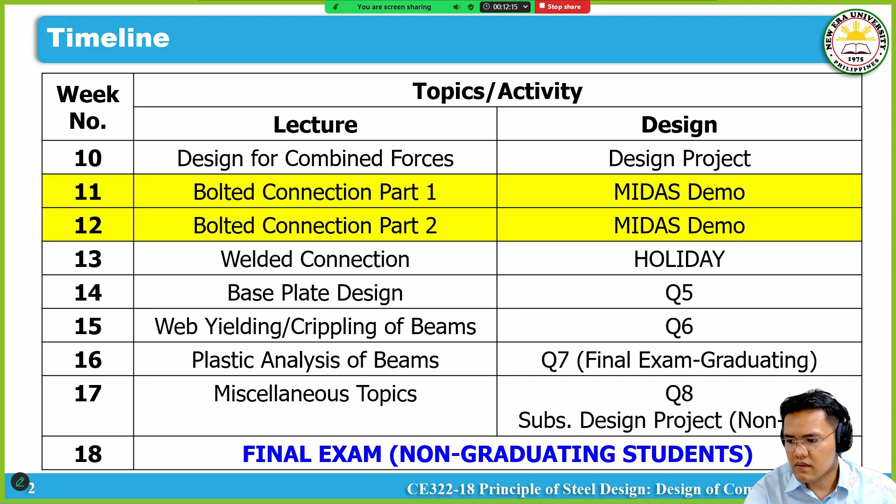So chapter 7 na tayo, which is bolted connections. Tapos na tayo sa member design, okay? Ang next stage is to do connection design.

So ito yung mga learning outcomes natin for today: understand the advantages and disadvantages of bolted connections, explain at least one bolt installation procedure, enumerate different modes of failure for bolted connections, determine the bolt capacity or strength using bearing type connection as well as slip critical connection, also what if combined stress na siya under these two types of bolted connections, and also to design eccentric bolted connection, which is discussed on section 510.3 of NSCP 2015.

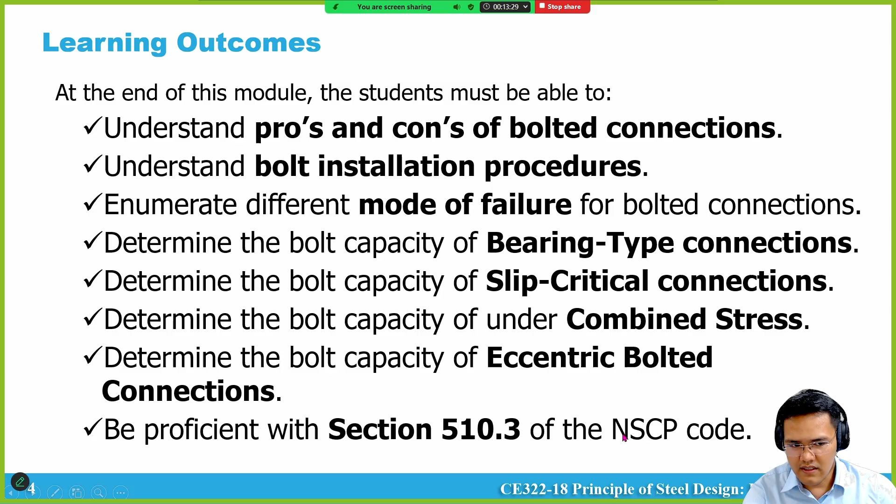Okay, sige, introduction muna tayo to connection design. So, just ground rules, no, to and some quotes to help set the tone for the presentation for today.

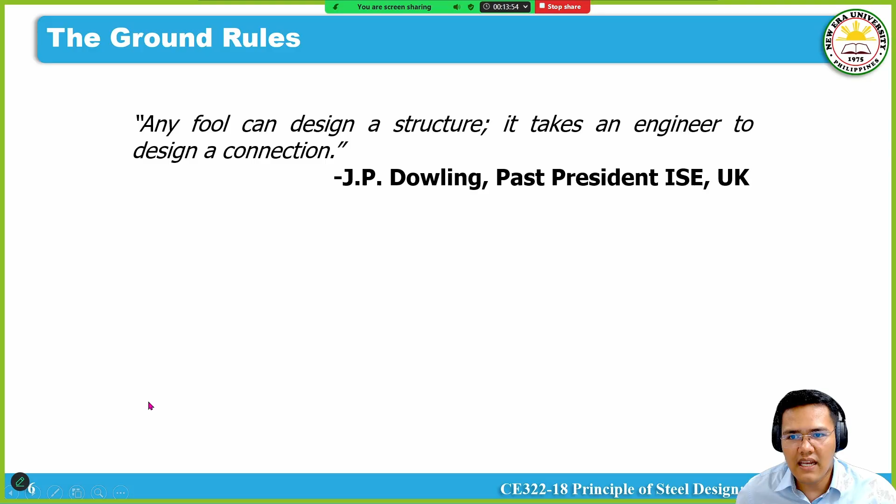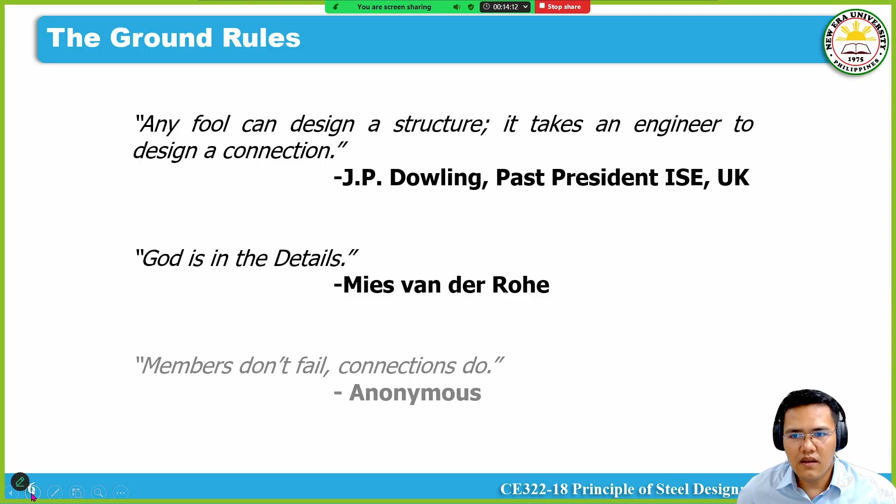So, any fool can design a structure. It takes an engineer to design a connection. God is in the details. Okay, so don't take this literally. Ibig sabihin lang niyan, vital or critical yung detailing ng ating mga connections. And lastly, members don't fail, connections do.

Okay, so just a recap in terms of the design process, we already explained this on the previous chapter, but if we would continue specifically dun sa last stage, which is the design and detailing, ang sabi natin dito, kapag pasado ka na sa member design, okay ka na sa member design, the next step, assuming na acceptable na yung member design mo, is to proceed in the connection design and detailing.

Okay, so yun yung step. Hindi pwedeng mauna si connection design bago mag-member design. Primarily because kapag merong changes, sa halimbawa, inuna mong gawin yung connection design and merong changes in terms of the dimension ng member mo, after mo proceed sa member design, uulitin mo ulit si connection design. So, to make sure na hindi repetitive yung ating calculations, we should always proceed with the member design, and then to follow si connection design.

Just to give you an idea, in terms of actual practice, meron tayong dalawang two possible workflow on steel design, specifically on connection design. Usually, dito sa Philippine setting, meron tayong as I've mentioned, dalawang workflow.

Yung option 1, which is usually nangyayari sa Philippine setting, is yung scenario na kung saan yung engineer of record or the EOR of the member design would also perform the design of your connection. So ibig sabihin, for option 1, kung sino yung gumawa ng member design, siya rin yung gagawa ng connection design. Now, yung option 2, which is usually adapted sa US, may scenario doon na kung saan kung sino yung engineer of record or the EOR for the member design, separate yung EOR ng connection design.

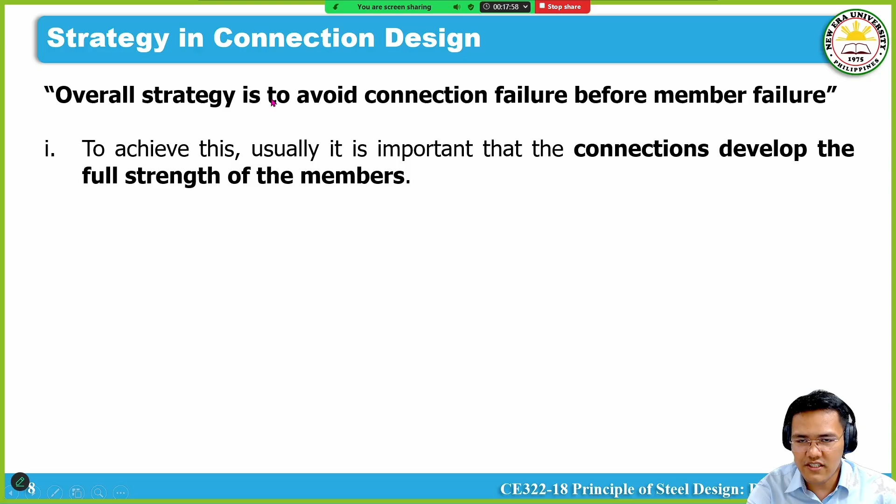Okay, ito yung overall strategy sa connection design. So the overall strategy is to avoid connection failure before member failure. Bakit? Kasi alam niyo na 'to, di ba? At para ma-achieve daw 'to, yung overall strategy na 'yan, dapat yung connections mo should develop the full strength of your member.

Basically kasi kapag sinabing connection failure, yung connection failure is not as ductile as the steel member failure. Parang pag sinabing connection failure, it's brittle failure. Without warning, magpe-fail yung structure mo. Gusto natin ductile mode of failure like yielding na usually occurs on your member, so hence it is desirable to avoid connection failure before the member failure. So dito pa lang nagkakaroon ka na ng idea, based dito sa argument na to na dapat yung capacity ng connection should always be greater than the capacity of your members. Ito yung pinaka overall strategy natin in doing connection design.

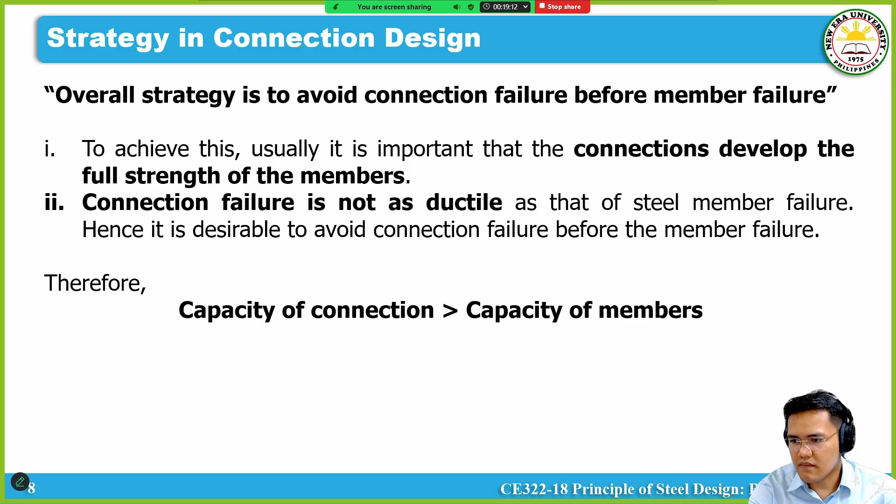These are past disasters I want to show you. Number one, the Hyatt Regency Hotel collapse, for buildings. This is the link I'd like you to watch on your own. And the I-35W bridge collapse in the US, for bridges. Here's the link for the documentary video on YouTube.

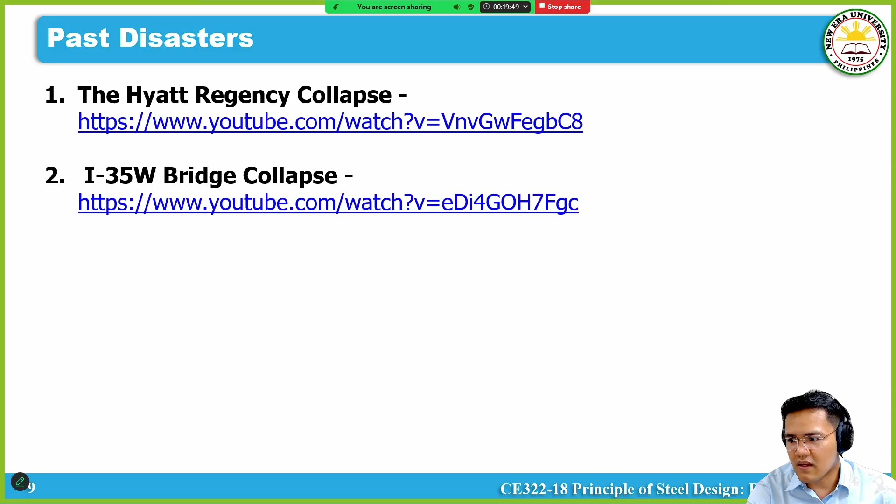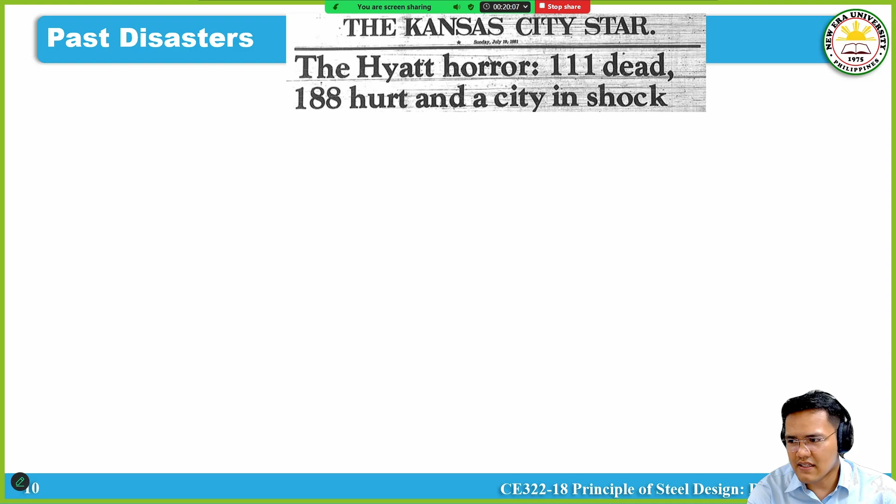Number one, the Hyatt building. Here's what happened: there were about 1,000 people in a certain structure where they had an event. Suddenly, the canopy collapsed, killing 111 people.

As they say, a doctor could kill a person one at a time, but an engineer could make it efficient, killing multiple people at once. So hopefully it's not like that — hopefully it's the other way around, where a doctor can save a person one at a time while an engineer can save multiple persons at once using a safe and sound design.

So that's what we hope happens. Anyway, the reason for this scenario is that this skywalk was supported by tension rods. What happened is there were changes to the original design of the engineer.

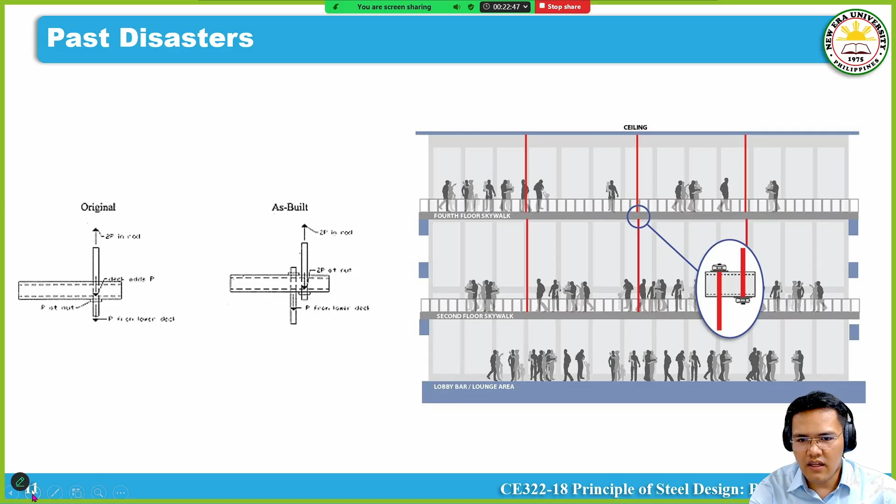I'd like you to check the video and the explanation. Basically, there was a change in design between the original and the as-built, and that was approved by the engineer, recommended by the contractor, probably to fast track construction. That's the reason why the skywalk failed.

This is specifically the part of the deformed box beam on the failed connection. That's one of the pictures on site during the forensic investigation.

So the overall lesson learned from this tragedy is that connections should be designed by a qualified engineer at some point in the design and construction process. Also, internal quality review is important for spot checking, especially if there are changes to the contractor's proposal.

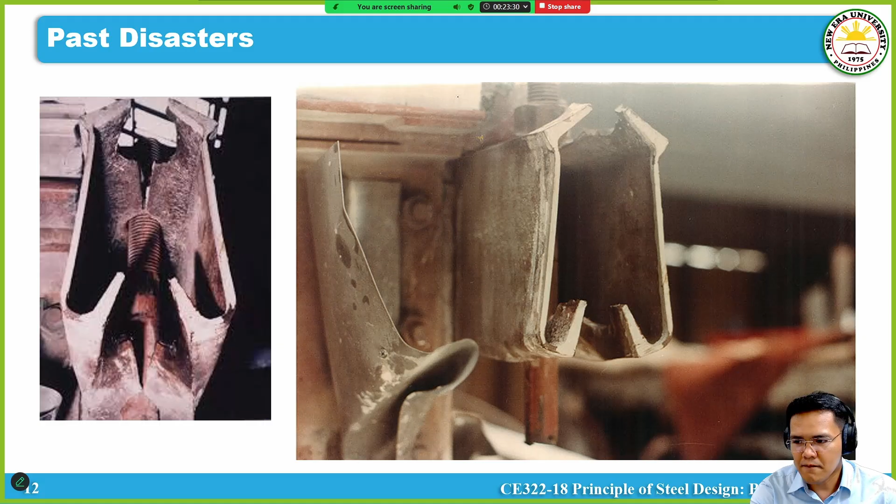Let's move on. Another example of a past disaster is the collapse of the I-35W bridge in the USA, back in 2007. What happened was during a busy time, rush hour, vehicles were bumper to bumper.

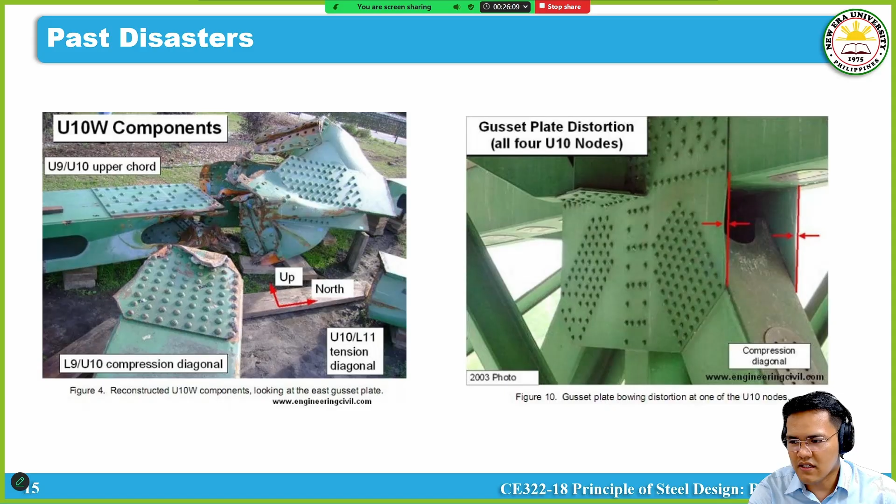Okay, we're good there. So basically what I want you to understand is that connection design is not something you take lightly, because many structures fail, and it's a critical mode of failure because they don't check their connections appropriately.

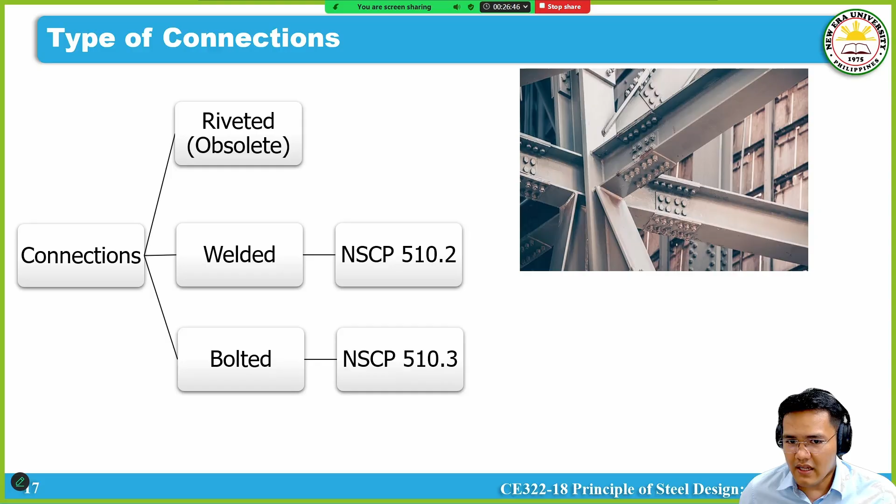So let's proceed on types of connection. As per the code, we have two present: number one, welded connection, which is presented on this section, and number two, bolted connection, which we'll discuss for today. There used to be a third type, riveted connection, but that's somewhat obsolete now.

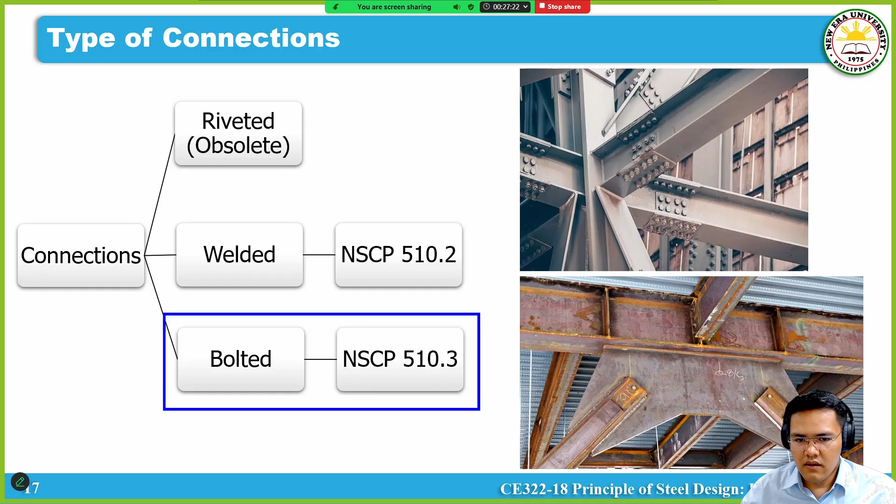So this is an example of bolted connection, obviously using bolts, and this is an example of weld. We would focus our discussion for today on bolted connections.

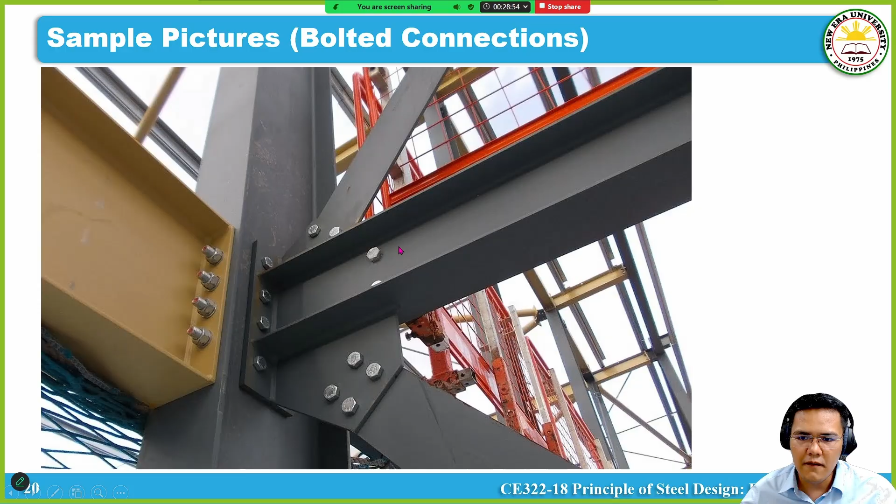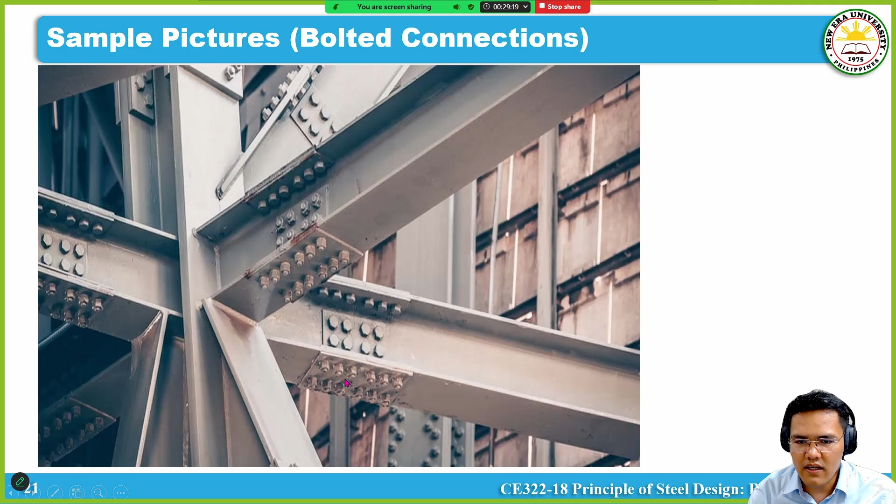Okay, this one is also bolted connection, but in this case, the connection to the column is welded. What's bolted is the continuation, possibly on the beam, beam to beam continuation, so both the flange and the web are bolted.

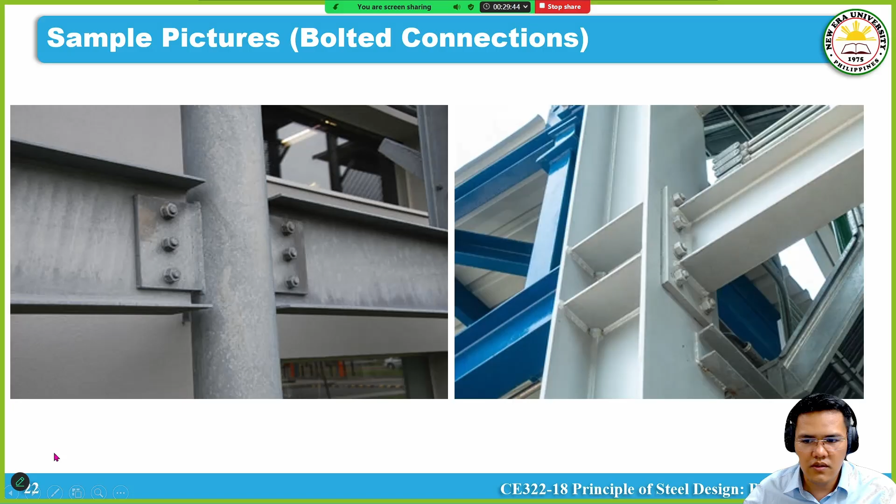Another example of end plate and stiffener plate for columns. So there's a continuation of connections. This one is another example.

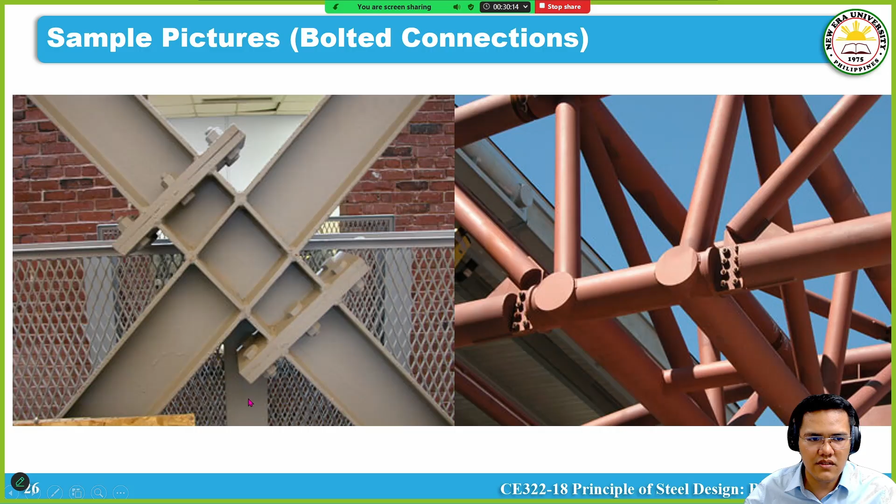This one is from software to actual construction. Another example of connections, hollow sections, bolted connection. So those are the examples for bolted connections.

Now let's discuss what's called idealized connections. So the question now is, how do we idealize our connections? It depends on what type of support you assume. Usually you have a pin support or pin connected joint, and the other one is the fixed support or fixed connected joint, like so.

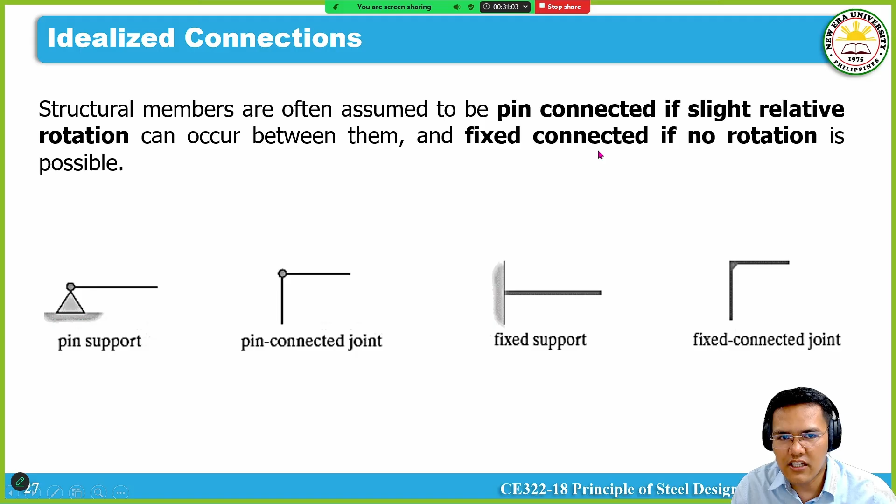For pin support or pin connection of our structural members, the assumption is that slight relative rotation can happen. While for fixed, no rotation is assumed. And obviously for pin connection, usually there's no moment at the support, while for fixed, there's obviously moment.

So this is an example representation of pin support in actual steel structure or connection detailing. You can see here that the girder connected to the column uses two angles, like so. This is the angle you see on this side, and if you look on the other side, there's also one. So these are the two.

So it's connected, bolted to the flange and also bolted to the web of the girder. Again, the assumption for this type of connection, for pin supported connection, the other term for it specifically in textbooks is a simple shear connection, which means it would resist shear only.

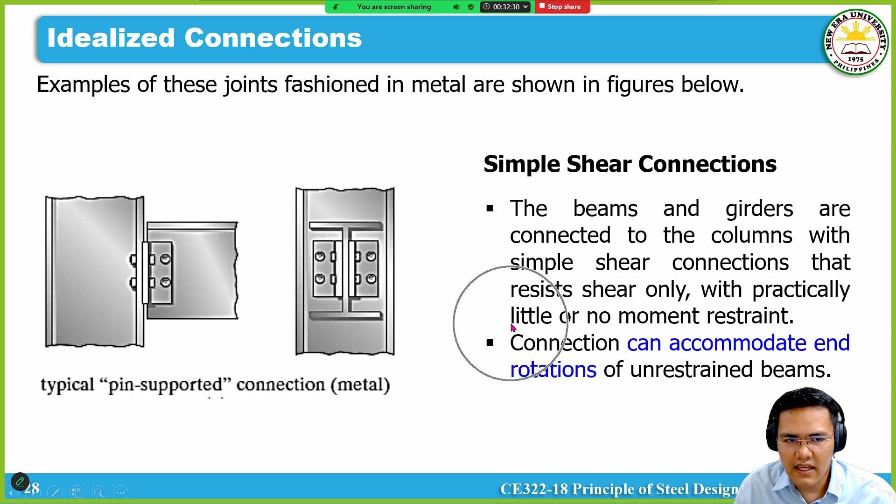And practically with little or no moment restraint. That's the assumption here. It can also accommodate end rotation of unrestrained beams. So this is what we call simple shear connections.

Similarly, for fixed support or connections, these are used in moment connections. Moment connection wherein it would resist lateral loads through bending in the columns and the beams or girders. And we have rigidity in the girder to column moment connection.

So here's an example of how it's detailed. You can see the beam is connected to the column, and as we mentioned, you add a stiffener so there's continuation in the transfer of loads. Sometimes it's even welded, so it's truly continuous. Aside from both sides being bolted, at the bottom you also add an angle which acts as a seat support for the girder. That's the seat used to idealize the actual moment connections.

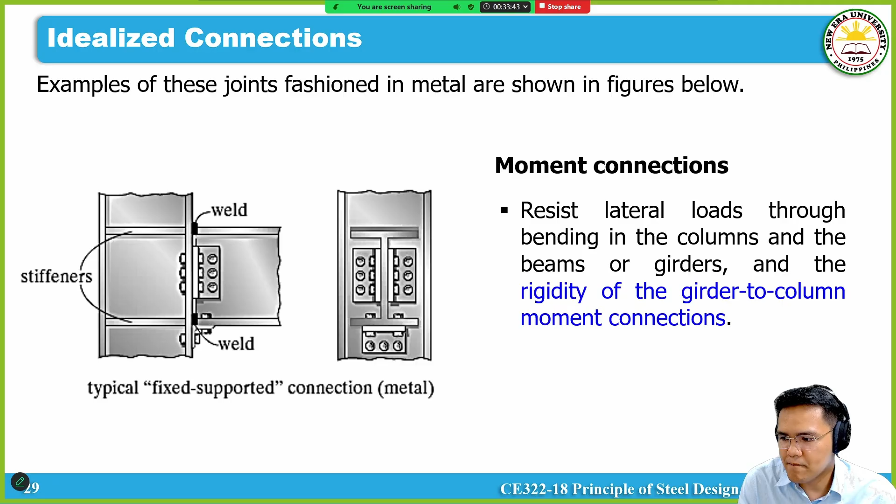Advantages and disadvantages: for bolted connections, installation is easier since it doesn't require skilled labor like welders, who usually need certification—here in the Philippines welders usually graduate from TESDA and have certification for that. With bolted connections, you can demonstrate it to another person and they learn quickly, or pick up fast on how to perform any bolted connection on site.

So it doesn't require skilled labor or special equipment. For welding, you need special equipment and power supply to operate that equipment. Bolted connections are more appropriate for field connections—connections done on-site. From a safety standpoint, there's no fire issue since no electricity supply is used for bolted connections.

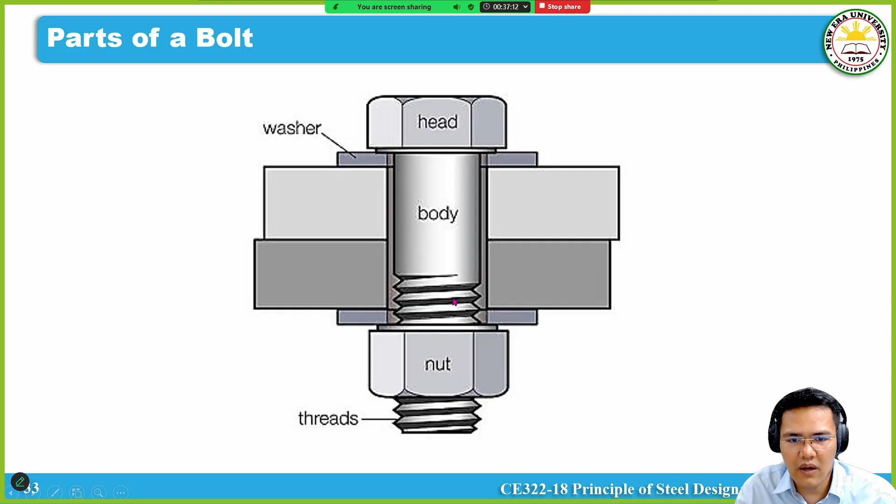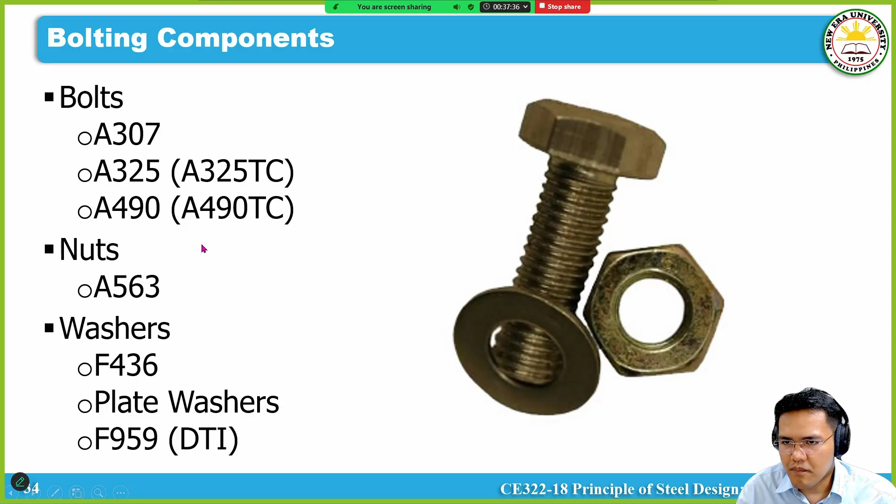Now, in terms of bolts, there are different grades we can use. For bolts, these are the grades usually used. For nuts, these are the grades. And for the washer, any grade or specification. So let's proceed first on bolts.

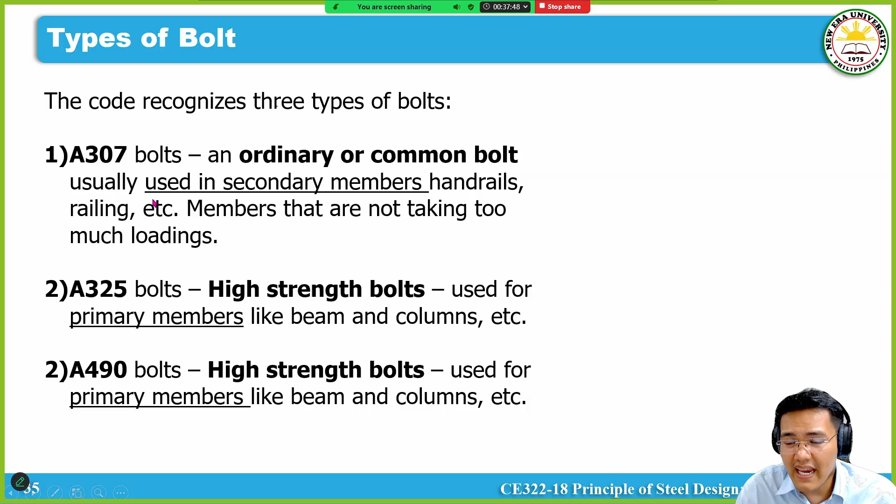Now, in terms of types of bolts, there are three usually used. Number one is the A307 bolt. A307 is the usual one used for ordinary or common bolts, which is applicable for secondary members or non-structural connections or members—for example, bolts for handrails or railings at home. So this is applicable for members that are not taking too much loading.

Now, if you're dealing with structural members, you should use high strength bolts. Number one on our list is the A325 bolt, which can be used for beams and columns, etc.—basically structural elements.

Now, there are cases where your A325 bolt fails, you could use the next in line, which is the A490 bolt. The counterpart in terms of the member or steel material: for steel members, we have A36 and A50. For bolts, we have A325 and A490. So that's the counterpart when it comes to member material.

Now, in terms of types of bolted connection, as per the code, we have two: number 1, the bearing type connection, and number 2, the slip critical connection. Let's go first to bearing type connection and discuss that.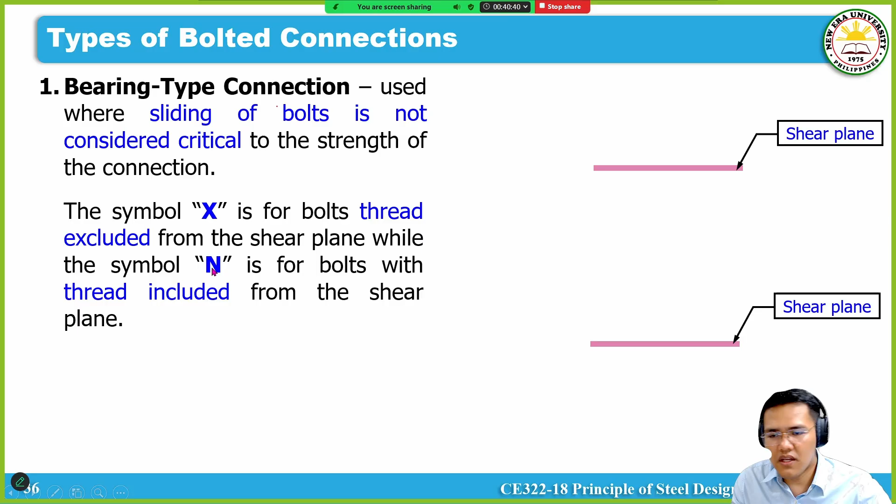Now maybe you're wondering how you'll know if it's a bearing type connection. Usually we use the symbols X and N, which we append to the bolt name or type of bolt. To give you an idea, as we said earlier, we have

A325 and A490 bolts. You can append a letter to these — two possible letters. When you see that, it means automatically it's a bearing type connection. For example, A325X or A325N. Likewise we could say A490X and A490N. The question is, what does X mean and what does N mean?

The symbol X pertains to when the bolt's thread is excluded from the shear plane. So how does that work? What does that mean?

Refer to this figure: you can see there are two plate materials connected using a bolted connection. When you apply a load on one plate, the direction of the load on the other plate would be in the opposite direction. And we all know that with this applied load, the bolt has a shear failure plane, which is at the boundary of the plates — that's where the bolt shears.

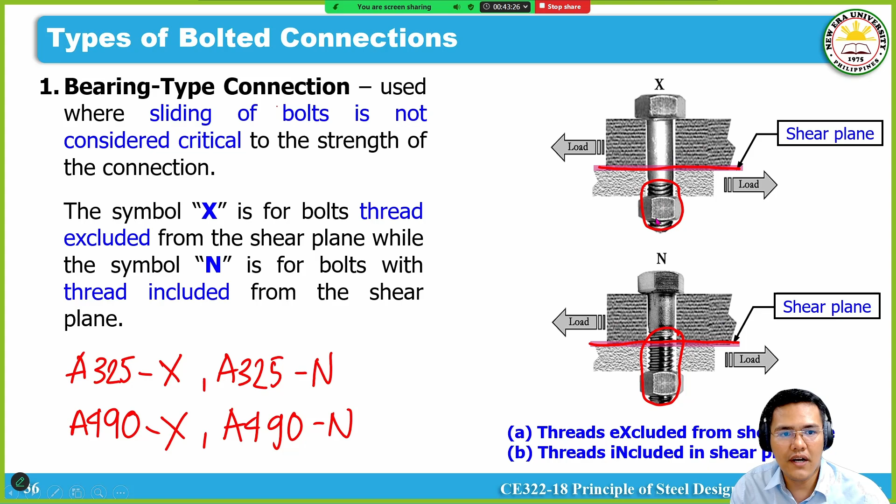On the other hand, in this scenario, the opposite case — this is the shear plane — you can see the thread falls into the shear failure plane. That means N pertains to included: the thread is included on the shear failure plane. So those are the usual types of bearing type connection: either X or N, depending on whether the threaded part is included or excluded from the shear plane.

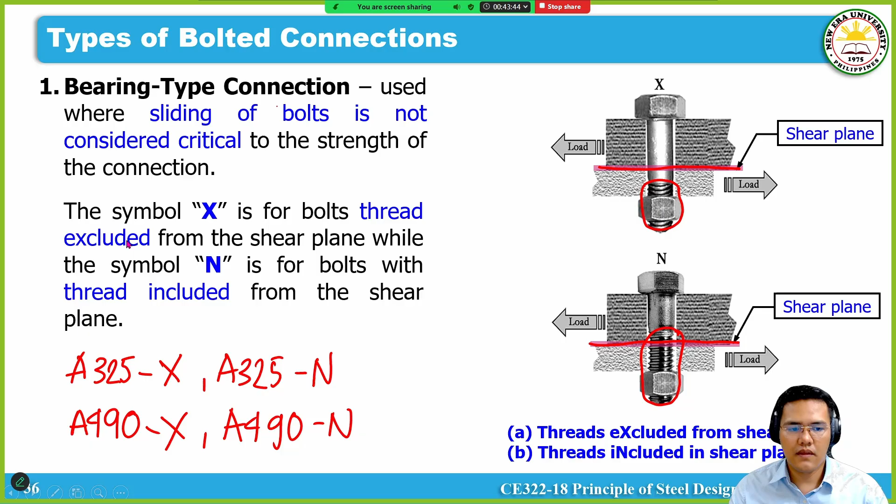Okay, let's move on to the next type of bolted connection, which is the slip critical connection. In bearing type, sliding is allowed; in slip critical — also called friction type connection — sliding is not allowed.

This is usually observed in bridges, because bridges have loadings due to vehicular loads that cause reversal, especially in truss members. For example, as a truss member, you get force reversal in the loadings on your members and even on the joints. These reversals, due to repetitive force, cause fatigue failure, which is usually observable on steel bridges.

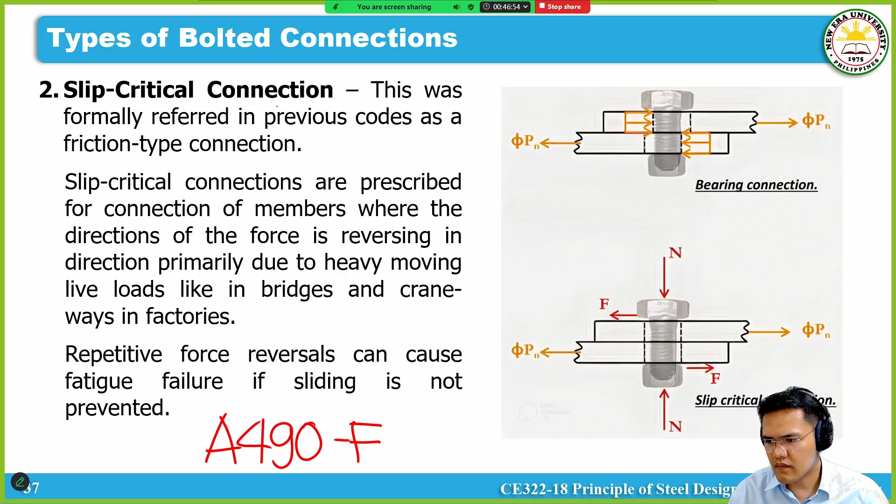Sige. Let's discuss bolt installation procedure now. In terms of installation procedure as per NSCP 2015, usually meron dalawang procedure. Yung usual, which is the snug tight connection, and for pre-tension and slip critical connections.

So under these connections, ito yung mga usual na methods na ginagamit to achieve yung tension. Okay? Yung turn of the nut, calibrated wrench, okay? So on and so forth. Okay? But for the sake of our discussion, you would only go in depth on the turn of the nut method na tinatawag. Okay? So ano ba tong turn of the nut method? Okay? On how you would install our bolted connections.

Okay? So, on turn of the nut method, as per NSCP 2015, merong dalawang step yan. Okay? Yung step number 1, wherein yung bolt mo is tightened up to the snug tight position. Okay? So, ang question is, ano ba ibig sabihin ng snug tight? Okay? So, dinipine din sa code yan.

Okay? As per NSCP, snug tight is the tightness attained with the few impacts of an impact wrench or the full effort of an iron worker using an ordinary spud wrench. Which means to say, basically, kuha ka ng spud wrench, tapos ilagay mo yung nut mo, iikot mo yan, okay? I-install mo yan.

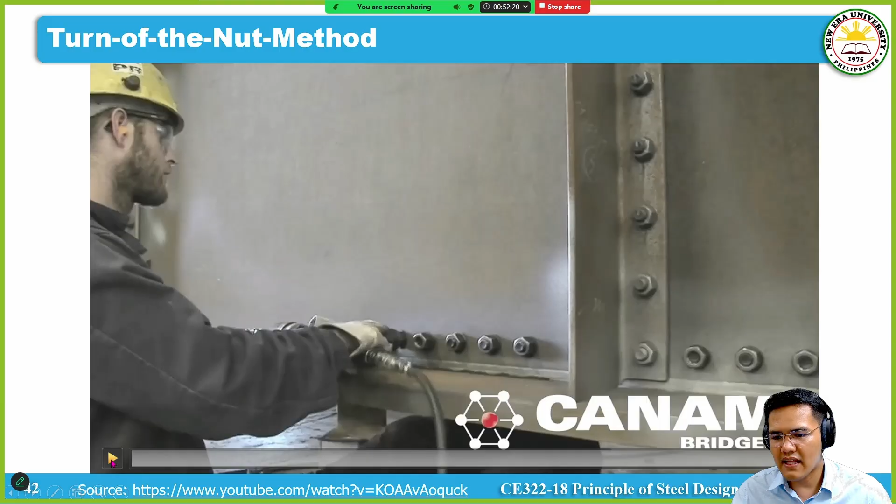Sige, pakita lang natin on a video kung paano ginagawa yung turn of the nut. But on this case, gumamit siya ng pinaka machine. Okay? Sige, step 1. Snug tight position.

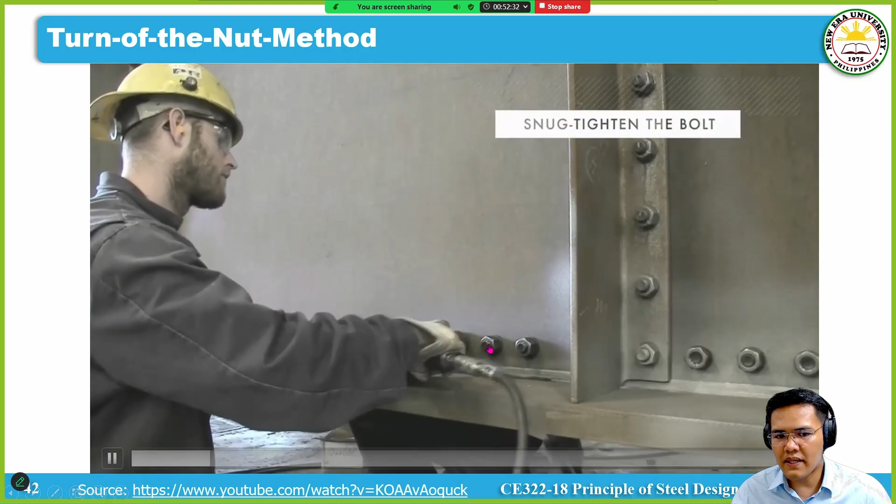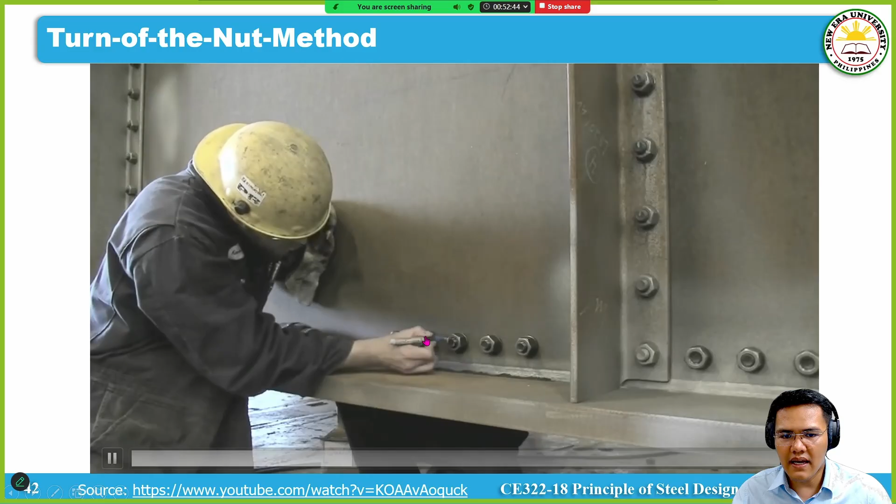So hinihigpitan niya yung pinaka-bolt and nuts mo using a machine, parang snug tight yan. Nag-stop na siya. Okay, yung next step na gagawin niya, guguhitan niya yung pinaka-bolt mo tsaka yung pinaka-nut ng straight line. Parang yan yung original position.

Tapos maglalagay siya ng additional turn. Parang yan yung reference niya pag naglagay siya ng additional rotation. Naglagay siya ng additional turn which depends dun sa grade ng bolt, length ng bolt, and diameter ng bolt. Okay, so yun, umikot na yon, umikot na yung bolt na yon.

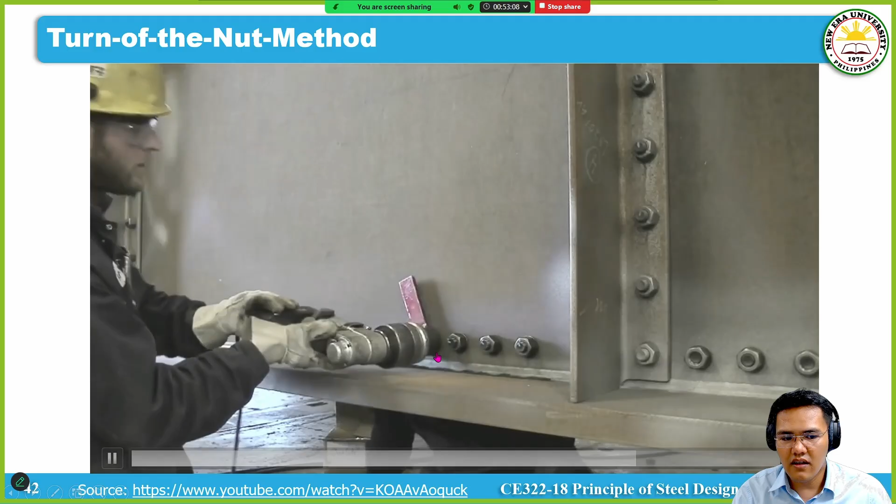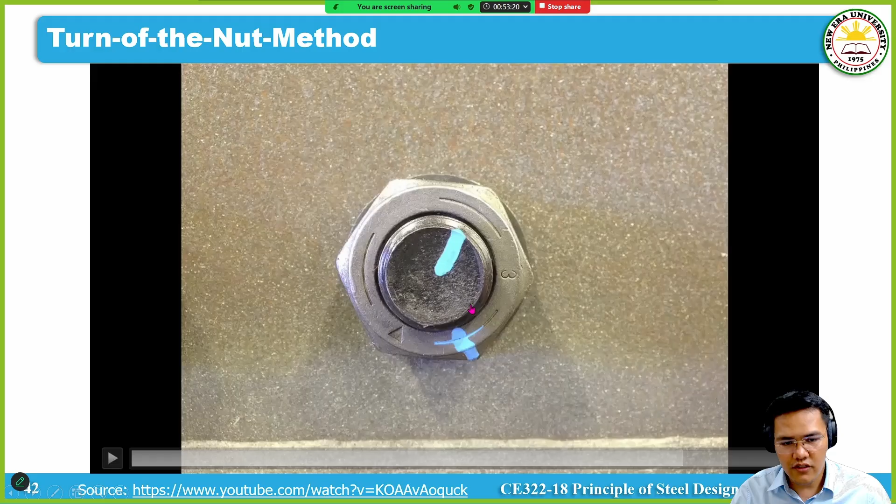And then after nun, i-check niya kung ano yung naging additional turn, kung appropriate ba na 1/3 ba yan or 1/4, so on and so forth. So basically, that's the snug tight, the turn of the nut method.

The question is, especially kapag nasa site na kayo, meron bang way to find out if yung mga bolts na sinupply sa'yo is substandard? Ano ba yung mga testing and inspection na pwede natin gamitin? So actually meron, ito yung ginagamit nating device.

Yung bolt tension calibrator or Skidmore device, which is ginagamit to for pre-tension bolts, for pre-installation verification, para ma-check mo kung substandard yung mga bolts na sinupply sa'yo nung fabricator.

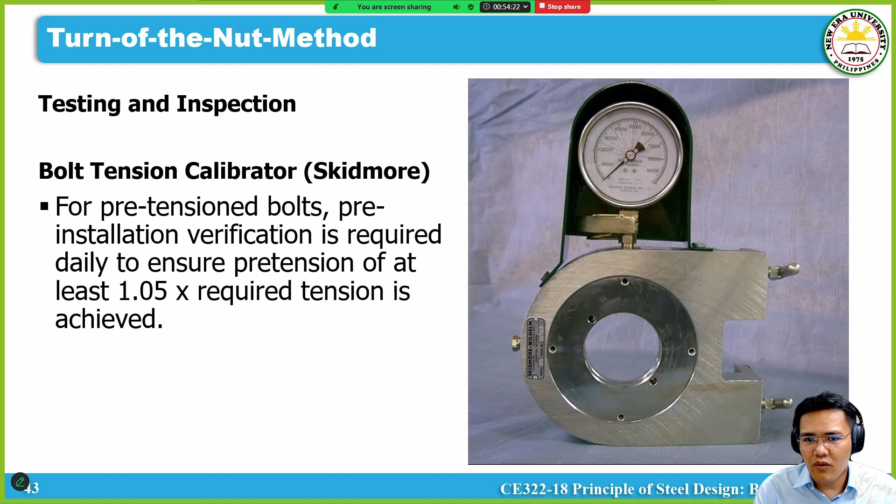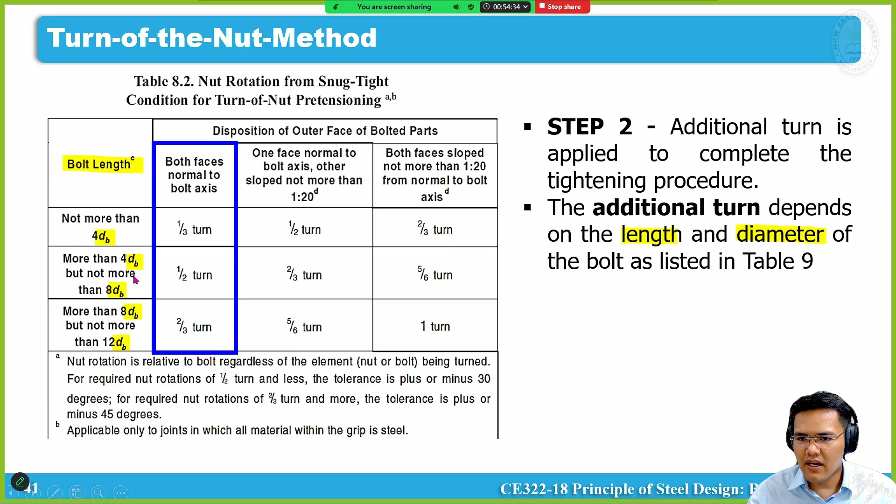So ito nga, itong video na to, pakita lang natin, mabilis. We're doing a pre-installation verification video on A325 bolts, 2¼ inches long. Basically in-install niya yung device.

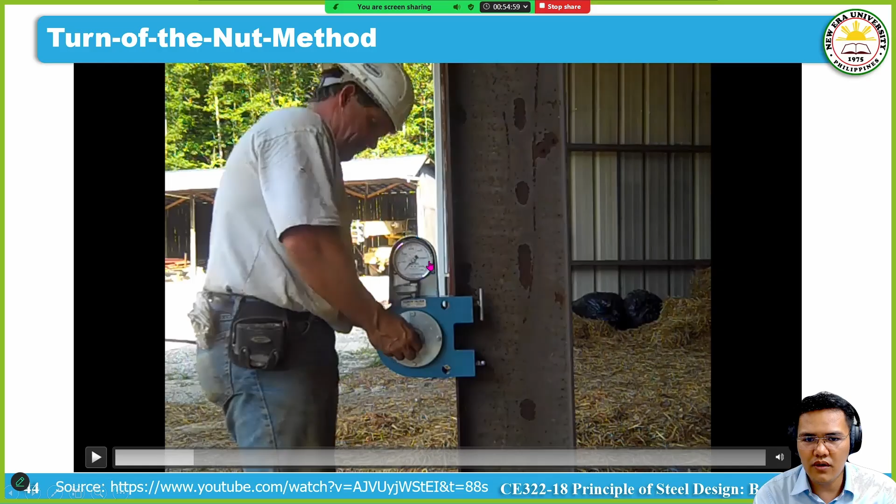Tapos ilalagay niya yung bolt doon. Basically yung device mo meron dial yan, diyan mag-register kung ilan yung tension force na binuhat ng pinaka-bolt mo. Then ang gagawin niya, na-install niya na yung bolt sa loob, lalagyan niya ng snug.

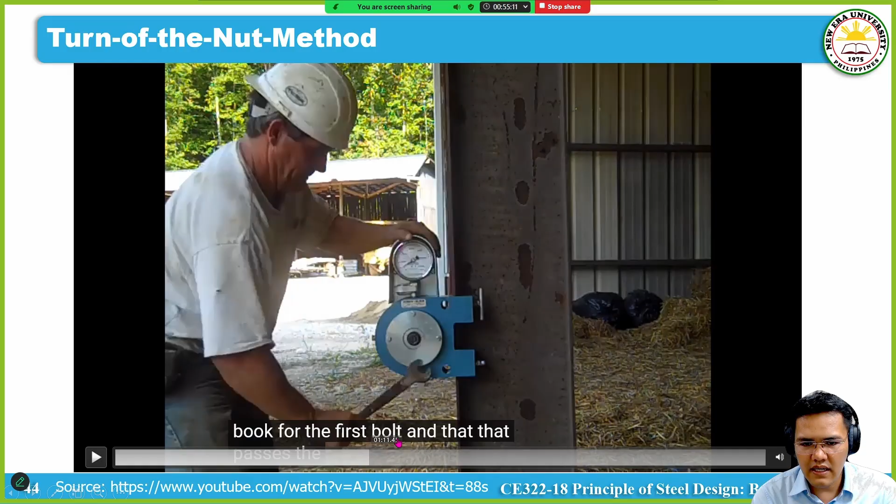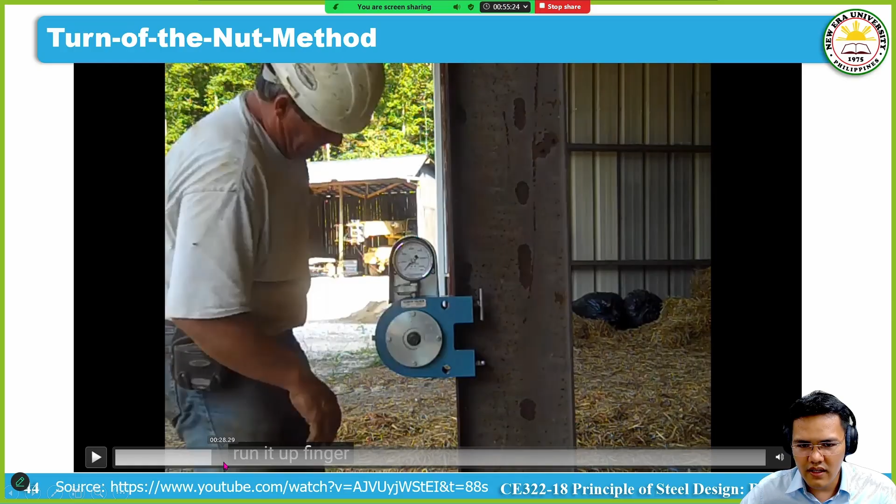Ilalagyan niya ng snug tight position, yun yung step 1. Okay, snug tight, sorry, parang lumampas tayo. Una, in-install niya yung bolt, nilagyan niya ng force, di na pinakita dito. Snug tight position yung step 1.

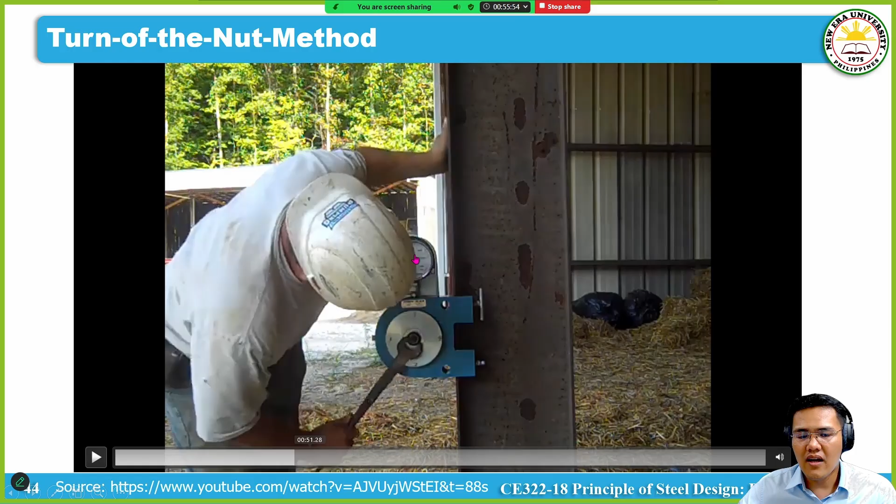Tapos sinulatan niya for the additional turn. Based dun sa bolt diameter and the length of the bolt, dun mo malalaman kung ano yung additional turn. Then naglagay pa siya ng additional turn ngayon. Nung na-achieve niya yung additional turn, merong mag-register na load dun sa dial. That would give you an idea nung actual bolt pretension na i-compare mo dun sa table, for the minimum bolt pretension. So basically yun lang.

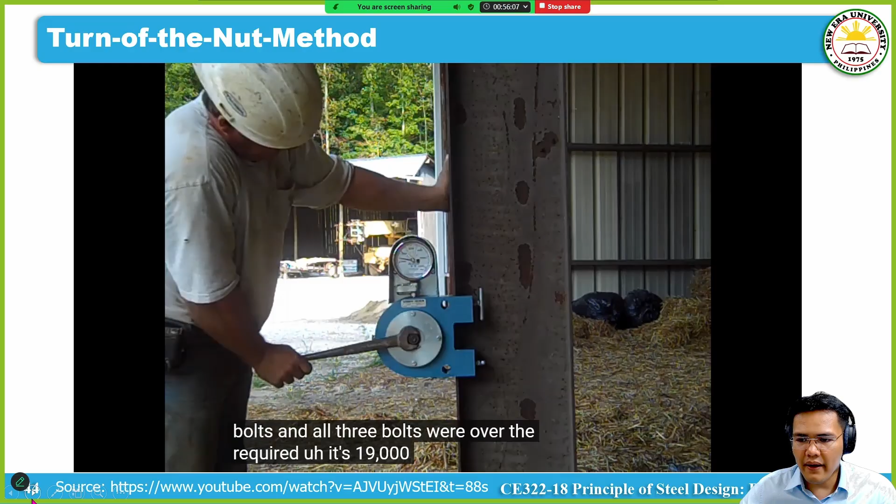Yun lang yung way to understand or to check or to verify yung mga bolts mo. Okay, it's recording. Sige, I think yung question entertain natin mamaya.

Let's proceed on failure modes ng bolted connection. Now in terms of connections, as a general, there's a lot of mode of failure na related sa connections. Sobrang dami, ito yun, nilista ko na dito. Sobrang dami, nakakalito.

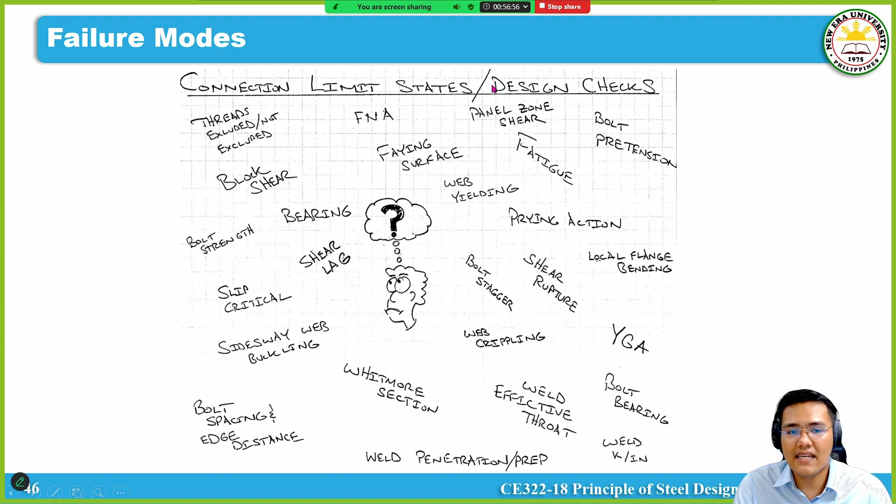Ngayon, yung a good engineer would understand ano yung dapat niyang i-ignore sa lahat ng list na to, na applicable lang sa kanya. So on this scenario, we would narrow down our mode of failure specific to bolts, since we're dealing with bolts connection.

So ito yung mga usual na failure modes. Number 1, yung shear failure of the bolts. Number 2, yung tension failure of the bolts. Yung number 3 is the bearing failure of the connected elements. Mind the term na ginamit for connected elements. Tear out failure of the connected elements.

Basically itong 3 and 4, just to give you an idea, laging magkasama to on the check. And sa code, pagdating sa NSCP 2015, pinag-isa lang to, at tinatawag siya na bearing on bolt holes, bearing strength on bolt holes. Pinagsasabay yung check na to, itong 3 and 4.

Basically, ang ginagawa, chine-check kung sino yung mas mababa sa dalawang mode of failure na to, tapos siya yung nag-govern. So mamaya ipapakita natin kung paano ba yung tinatawag na bearing on bolt holes. Basically, actually, tatlo lang talaga to, itong di-discuss natin. Sineparate ko lang yung dalawang mode of failure included dun sa bearing on bolt holes.

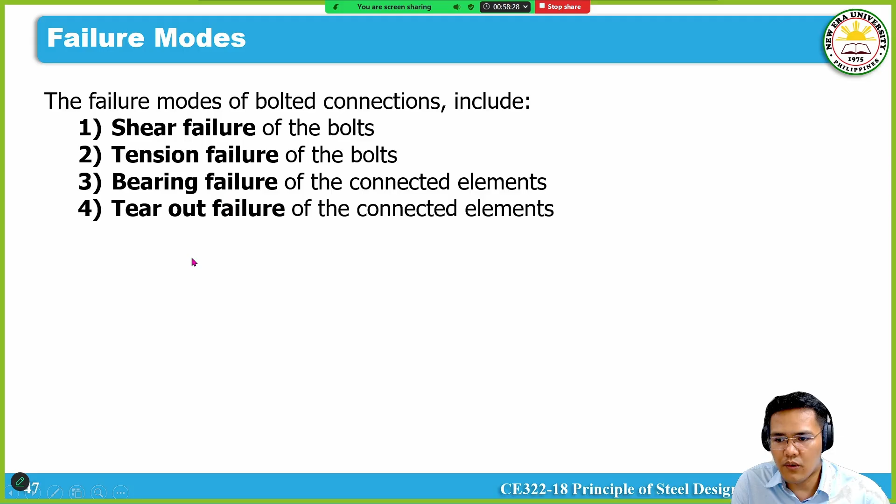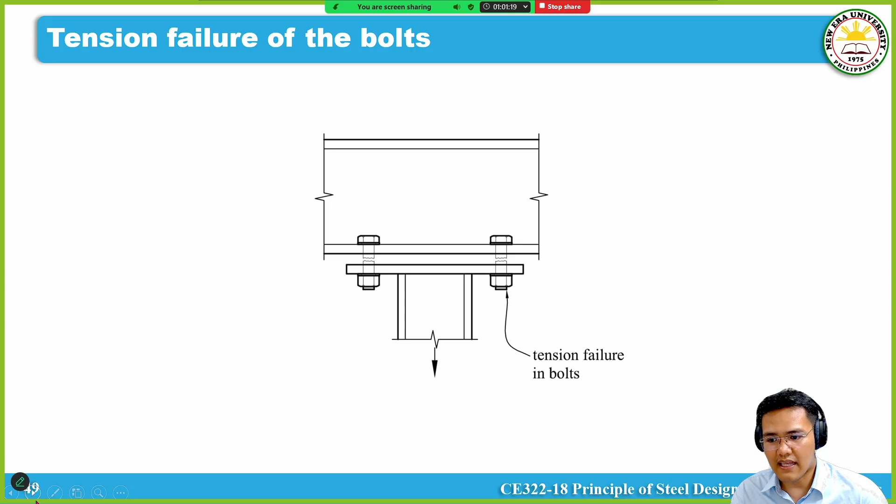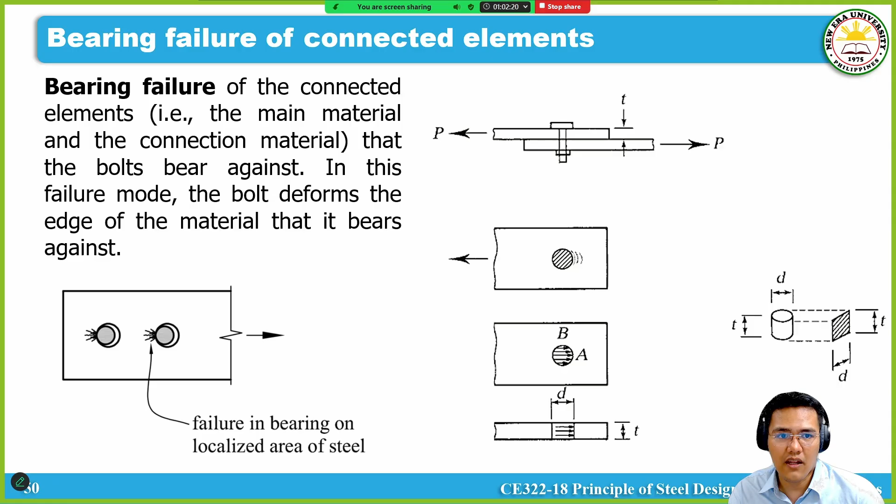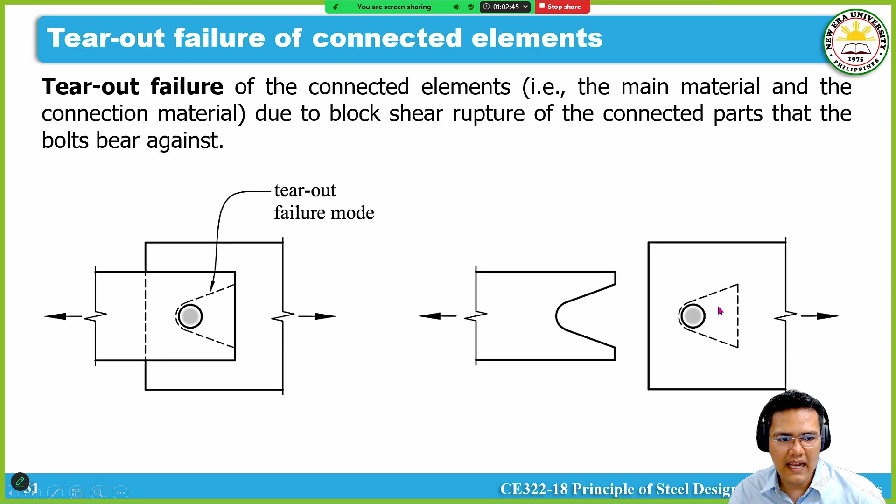So basically, from this one, it gets removed - part of our top plate gets removed, leaving it behind.

Let's discuss the tensile and shear strength as per the code. As per the code, our nominal strength for tension or shear of bolts - just to emphasize, this is nominal strength, tensile strength or shear strength - the formula is the same, and it was presented in section 510.3.6.

The code says it is simply equal to Rn equals F sub n times A sub b. So the question is, what is F sub n? What is A sub b? Let's discuss F sub n.

F sub n is simply the nominal tensile stress, F sub nt, when your action is tension - that's clear. What if your action is shear? If it's shear, then the shear stress F sub nv is what you'll use, and the code says you get it from Table 510.3.2.

Let's reflect that later on the next slide. Let's go to that.

Okay, while the A sub B, this is the area, right? Now, question: what area is this? Threaded area or unthreaded area? So it's clear here, code says it's a nominal unthreaded area of our bolt.

It's unthreaded area. It is also specified in this section that for under strength, the phi for LRFD is 0.75 and 2.0 for the omega for ASD. This is clear because usually it's very low or very large, since it's a brittle mode of failure. So code really penalizes this, similar to block shear.

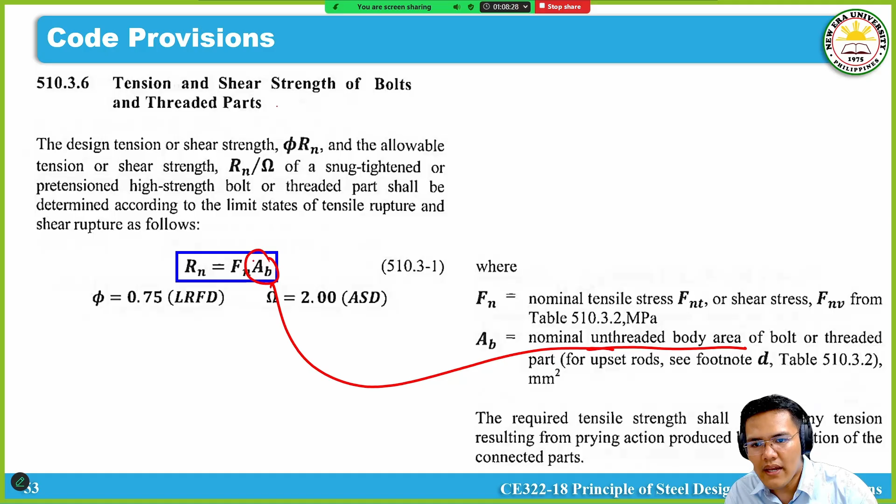Okay, so it makes sense. Coming back to our formula, F sub n times A sub b, you don't change this A sub b. Our formula for A sub b is the unthreaded area of the bolt, because what code did was adapt the deduction in area into F sub n, by incorporating it into the nominal shear stress, making included lower than excluded. So hopefully you picked that up and it makes sense.

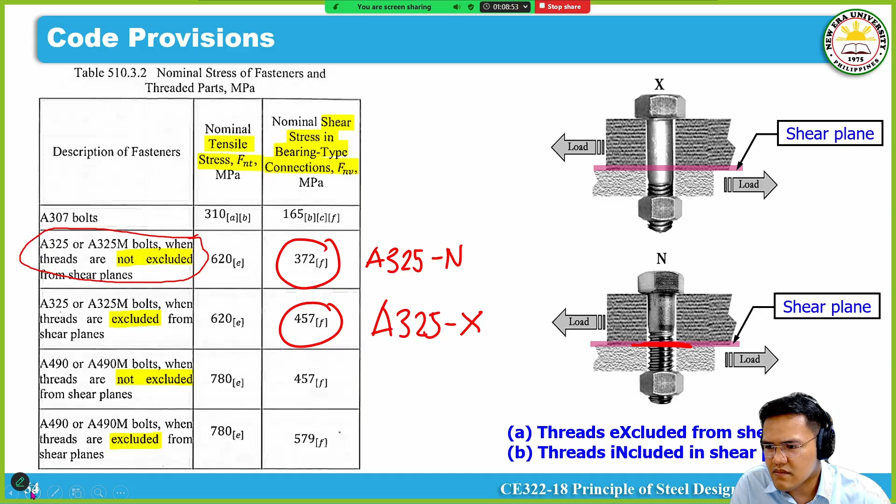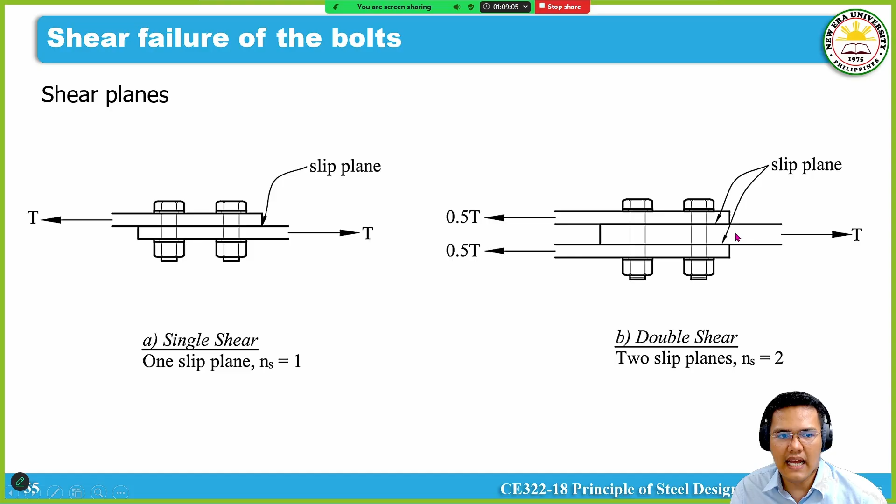Take note that for shear failure, the number of slip planes or shear planes is critical in the calculations. Usually students make mistakes here.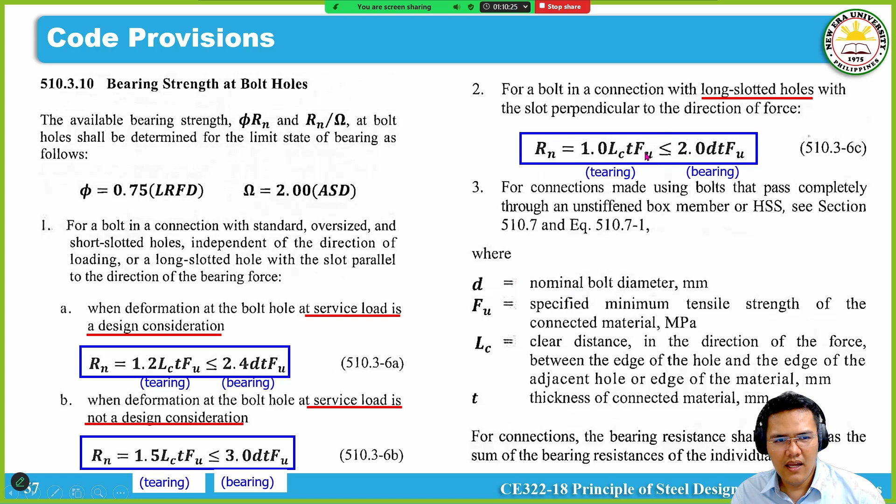Number one, the parameter D, just to be clear, this is the nominal bolt diameter. Emphasis, bolt diameter, not hole diameter. Baka magkamali kayo, huwag ninyong palitan.

Again, F sub U, alam niyo na yan. It pertains to the connected material, hindi sa bolt. Doon to, sa plate mo to.

Yung L sub C, this is the clear distance. Discuss natin mamaya kung paano nakakalculate yung L sub C on the tearing side ng equation. And the T is the thickness of the connected material, yung plate mo. Sige, so ayan na yung mga equation na present sa code.

Let's try to investigate paano ba siya nag-arrive on that equation. Unahin muna natin yung tearing. Siguro mas maganda, ito na lang yung ipakita natin, paano ba na-generate to or na-derive tong 1.2 L sub C thickness F sub U. Well, basically, if you have this failure surface...

Kasi yung bolt mo, meron yung reaction from the plate. Minsan, nagkakaroon ka ng tearing, ito yung matitear out. Kumbaga, ito yung pinaka failure path mo. You could simplify this one by assuming na ganito yung pinaka matitear out. Parang ganyan yung layout.

Now, in terms of the reaction, kung yung bolt mo meron siyang reaction dun sa surface na yon as R sub n. Since meron kang dalawang surface na shear, ito yung first line or first surface, ito yung second shear failure plane. So ibig sabihin kung ito yung reaction mo, yung kakargahin ng isang shear failure plane mo, divide 2 lang nung reaction. So that is R sub n over 2.

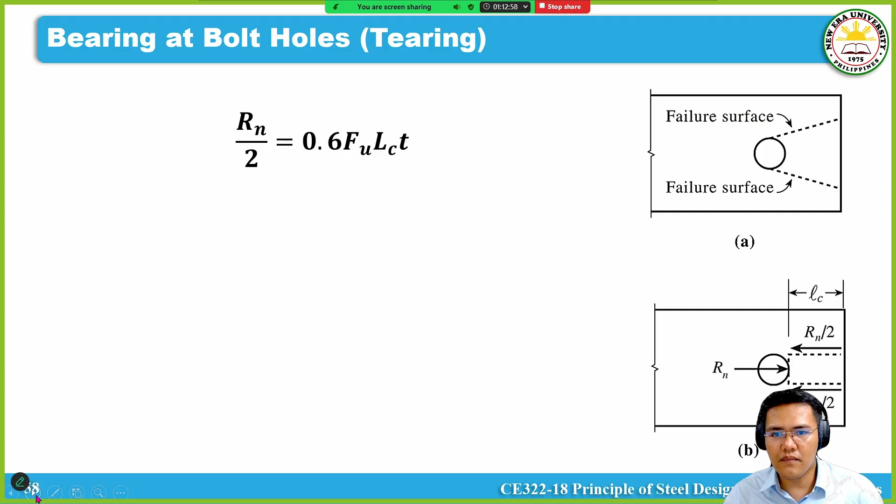At yung length na to nung ating pinaka shear failure plane, tawagin natin L sub C. Now, in terms of the equation, just to give you an idea, nag-arrive lang siya dun sa equation na stress is equal to load P over area, which kung i-rearrange mo yan, P is equal to stress times area. Now, ano ba yung load P?

Ano ba yung reaction dun sa isang single shear o na-tear out na plane? Well, yung reaction mo is R sub n over 2, yun yung P. Now, ano ba yung allowed stress for this type of mode of failure? As per the code, yung for shear fracture stress, ang ina-allow is 0.6 F sub U. Ito na yon, yun na yung stress na yon.

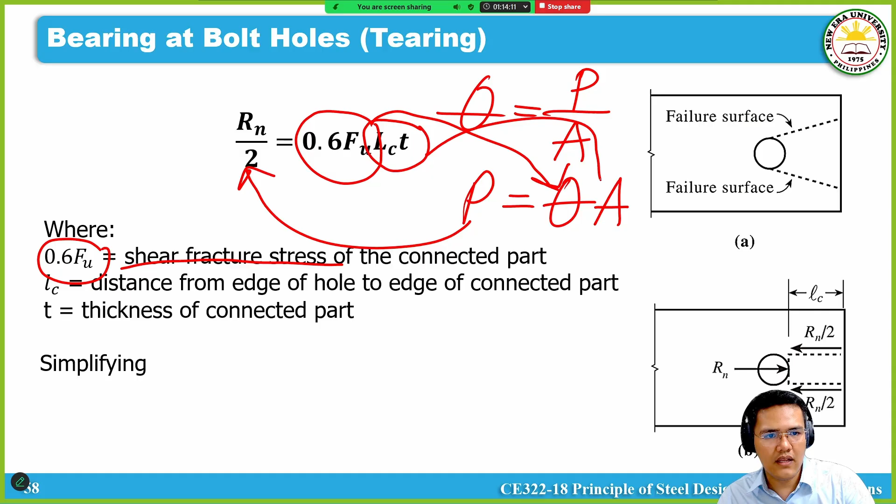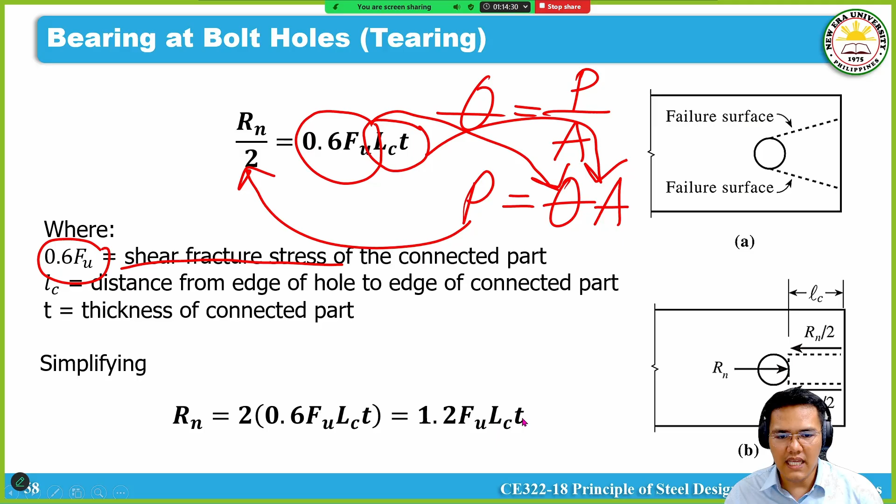Now, next is ano ba yung area na magre-resist? Dito, alam natin na yung length na to is the length LC, and para maging area yan, you need to multiply by the thickness of the plate. Ito na yung pinaka area natin corresponding to this. Now, simplify mo yan, yung 2 mapupunta ron sa right-hand side ng equation natin. Ito na yung magiging equation natin, and 2 times 0.6 is 1.2, F sub U, L sub C times T.

Okay, which looks familiar kasi yun nasa kabilang slide, for the tearing. Now, I would let you do the reading na lang on the textbook references na binigay ko sa inyo on paano na-derive tong mga to. For the tearing kasi pinakita na yun doon, at least meron tayong pinakita kung paano na-derive itong case A. Okay, so okay na to, let's proceed dun sa bearing.

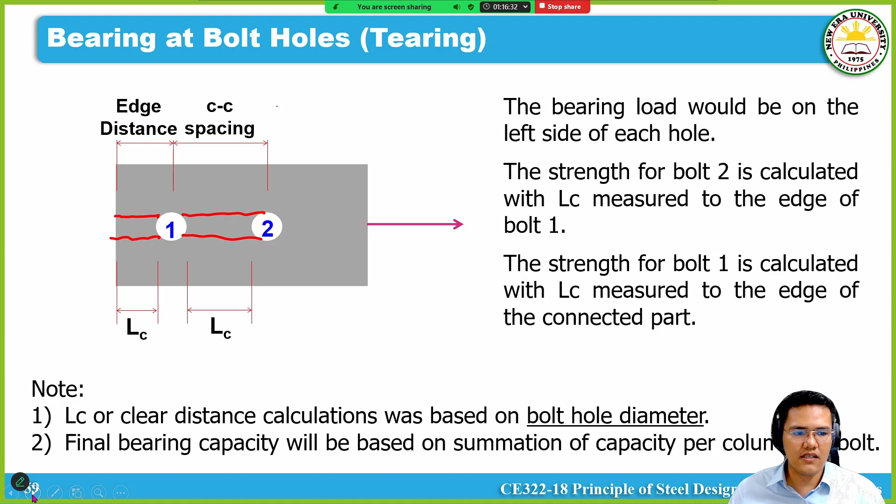Okay? For bearing naman, alam natin na ito yung equation natin, no? The projected area, ganun pa rin to. This is simply P is equal to stress times area. So yung P mo yung reaction, okay? Yung stress mo is ito. Yung area mo, again, sabi natin, that is the projected area, which is itong thickness ng plate at yung diameter ng bolt. Okay? So ito na yun.

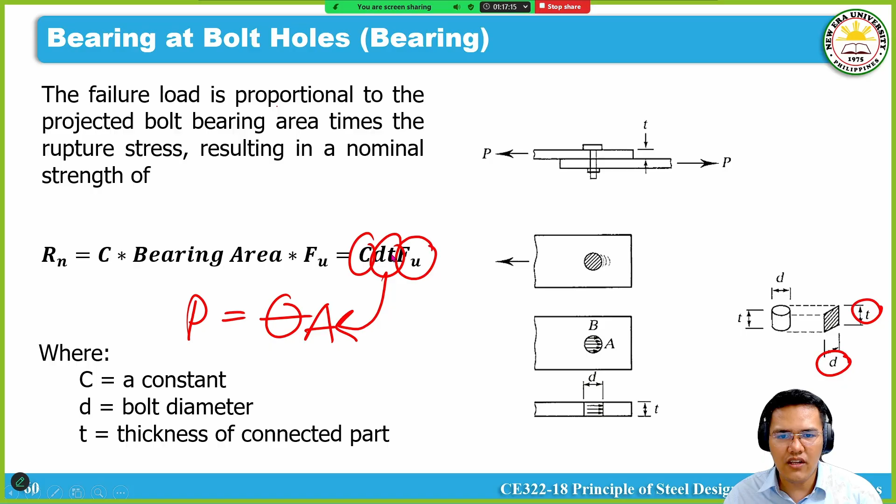And then, I would let you do the reading kung paano na-calculate yung tinatawag nating constant C, as per the textbook references. Kaya mapansin mo, basically, ito na rin yung formula for the bearing, nag-iiba lang yung value ng C, depende sa assumption, as presented dito: 2.4, 3, and 2.0. So ito na rin yun, yung pinakita nating equation.

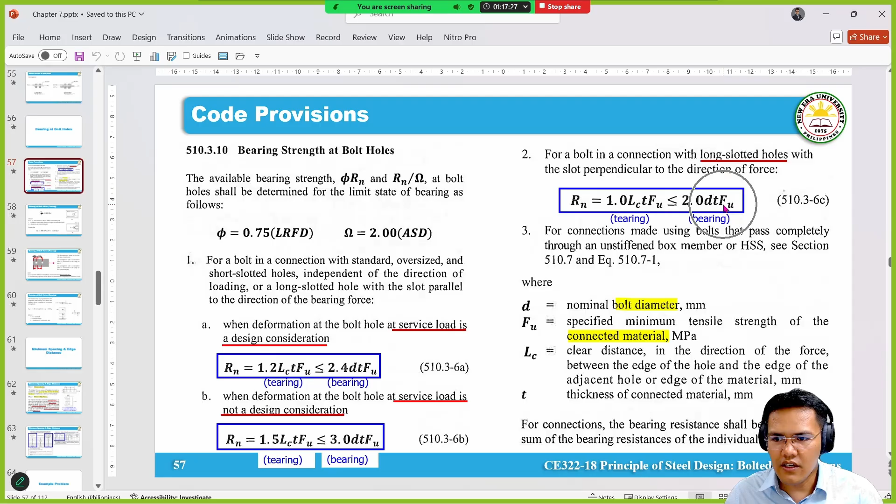Okay, sige. Let's proceed on the next topic, which is itong minimum spacing and edge distance. Okay? Now, as per the code, hindi kasi randomly nadidefine yung spacing natin ng mga bolts. Meron niyang minimum requirement.

Okay, so ito yung minimum requirement as per the code. As per 510.3.3 ng NSCP 2015, it discusses yung minimum spacing ng ating bolts. Ang sabi, the distance between the centers of standard, oversized, or slotted holes shall not be less than 2 and 2/3 times the nominal diameter. Okay, so anong diameter to? Nilinaw din, no? Nung fastener. Ano ibig sabihin, ano ba ibang term sa fastener? Well, it also pertains to our bolts.

Okay, so malinaw yun, diameter of the bolts. Yung ibang designer, ang ginagawa dito, as per the code kasi, a distance of 3D is preferred. Kaya yung mga designer, automatic, ito na yung ginagamit, kasi mas mataas to sa minimum eh. Anyways, as long as alam natin yung minimum spacing, we could do the calculations.

Okay, punta tayo ngayon sa, by the way, on this connection, obviously, yung minimum spacing ng bolts natin, ito yon. Para nagkakaintindihan tayo. Ito rin yon, yung S.

Now, yung next distance, yung tinatawag nating minimum edge distance, meron din tong value. As per the code, the distance from the center of a standard hole to an edge of connected part in any direction shall not be less than either the applicable value from table 510.3.4 or this section daw. Okay, in short, ang sabi ni code, for minimum edge distance, kapag standard hole ka, mag-refer ka lang daw sa table na to.

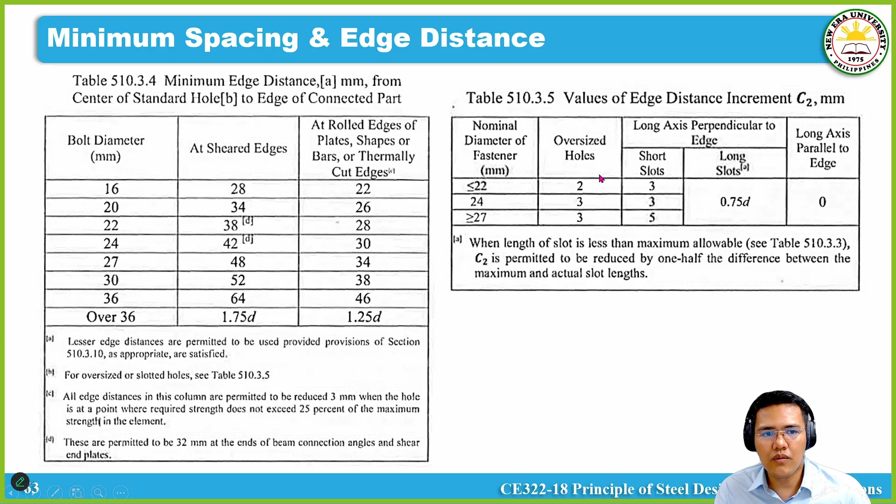Okay, malinaw din dito kung ano yung bolt diameter mo, ito yung corresponding C sub 2 for oversized holes. Okay, so yun lang yung sabi ni code, plus the applicable increment C sub 2 from table blah blah blah. Okay, so malinaw yun guys, no?

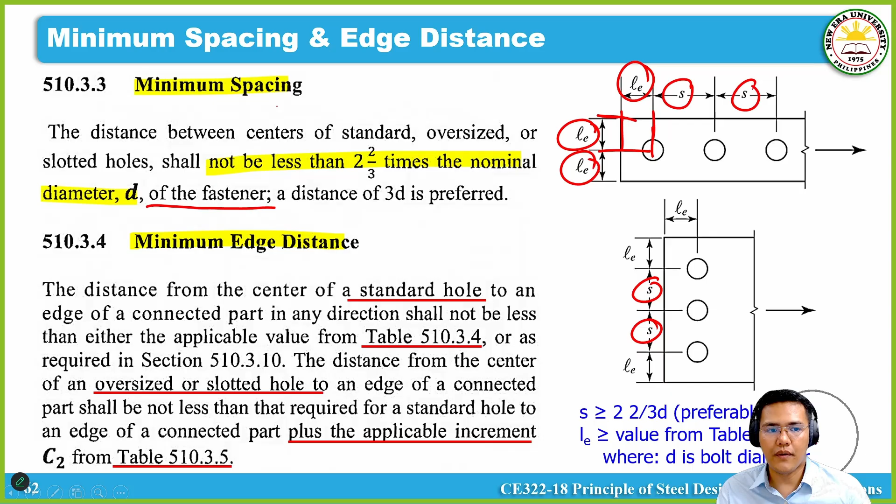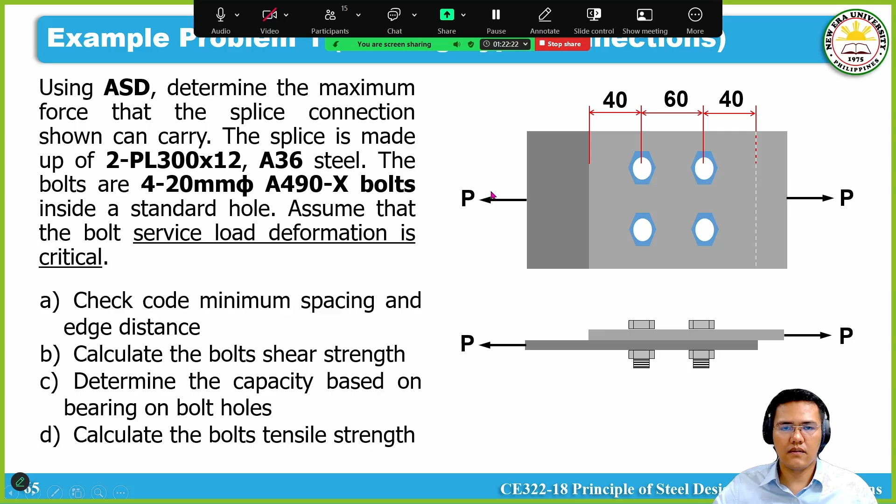For minimum spacing, summarize lang natin, ang requirement ni code, it should be greater than or equal to 2 and 2/3 nung bolt diameter. For edge distance L sub E, ang sabi niya, refer ko sa table 510.3.4. Okay, sige, okay na tayo dito. Skip natin to. Example problem na tayo.